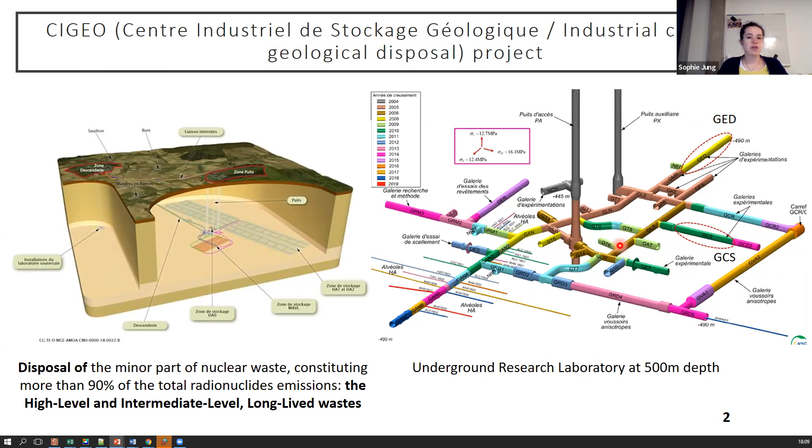During the excavation of the drifts constituting the underground laboratory, two different types of fractured zones have been observed, depending on whether the drifts were excavated in the direction of the minor principal horizontal stress or the major principal horizontal stress. For the first type of drift, the fracture zone tends to extend in the vertical direction, whereas in the second type, the fractured zone tends to develop in the horizontal direction.

For the first kind of drift, the convergences are very different: the vertical convergence is much higher than the horizontal convergence, whereas in the other type of drift, it's the horizontal convergence that is much higher than the vertical one. So it seems that the fractured zone influences, to some extent, the convergence of the drifts.

Many research teams have been working on modeling the convergence of those drifts, and their work has been published. Some of it appeared in an article by Seyedi et al. in 2017. The graph is kind of busy, but I'll try to make it clear. It shows different numerical simulations, hence the many curves.

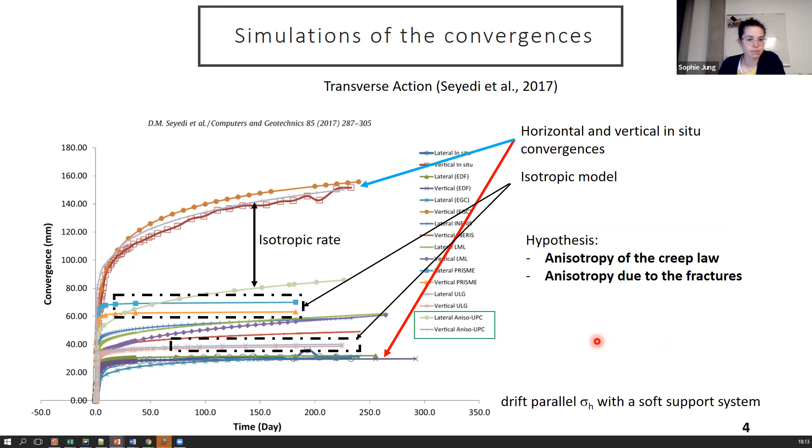So I will present you here quickly the outline of my presentation. What I'm going to present is a part of my PhD work, and I told you my two principal hypotheses.

First I will present the first numerical simulation of the convergences of GCS and GED drift with a continuous equivalent model, with numerical calibration of the parameters of anisotropy. Then we will try to link the parameter of anisotropy to the behavior of the fracture, and upgrade the numerical simulation. Finally, having linked the parameters of anisotropy to the behavior of a fracture, we will be willing to measure those parameters on a fracture.

So we also developed an experimental setup, especially designed to investigate the creep slip of a fracture.

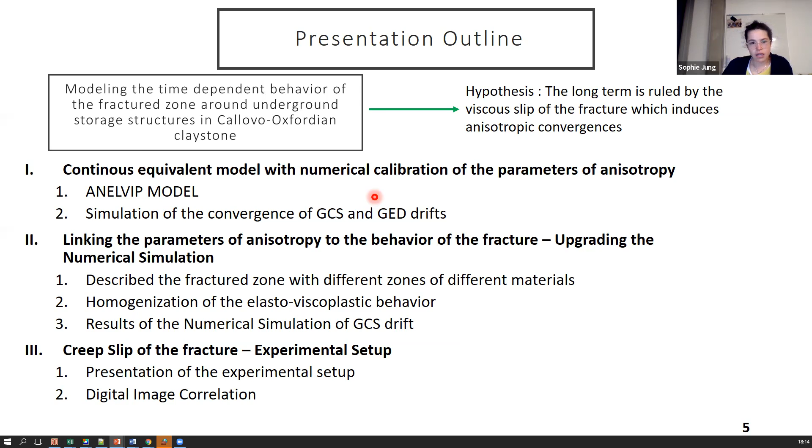First, I'm going to present the model used in the numerical simulation. It's the model ANEL-VIP, already present in the FEM code DISROC, and it's a threefold anisotropic model. The elastic, plastic, and viscous parts of the constitutive law are transverse isotropic. The plastic and viscous anisotropy are managed by anisotropic stress scaling, as introduced, but at the time only for plasticity, by Hill in 1948. The anisotropy is defined by two plastic parameters and two anisotropic creep parameters.

Basically for isotropic material, the parameters Fn and Ft are equal to 1, and the figure represented here would be a circle. Then if you change the value of Fn, you describe a change in the behavior in the direction perpendicular to the reference direction. So here you have one direction of reference, and by changing the value of Fn, you change the behavior in that direction. And so the circle becomes an ellipse, and Ft describes the behavior in shear. So the ellipse becomes a kind of star, which can be minimum or maximum at 45 degrees.

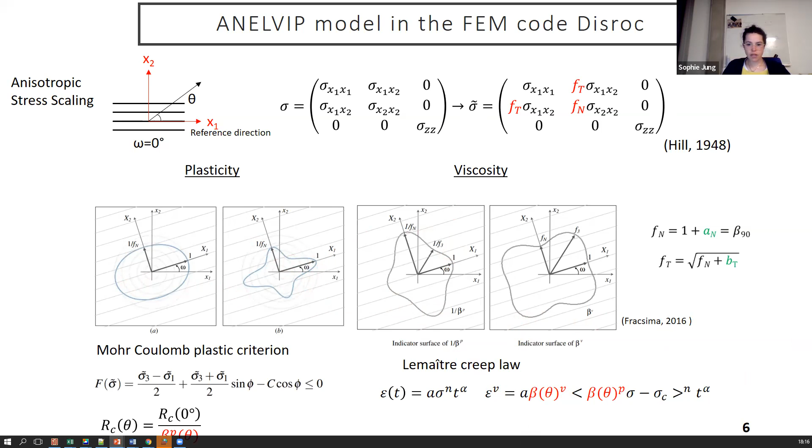In our first model, we considered one unique material for the whole medium, without making any difference between the fractured zone at the vicinity of the drifts and the sound rock. Our objective was to reproduce both measured convergence of GED and GCS drift with the same model. The elastic, plastic, and viscous law and parameters are the same for both drifts, and the anisotropy in the model is assumed to be due to the fracture.

We assume that the direction of anisotropy is the same direction as the main fracture around the drift. So basically for GCS drift, you have a vertical fracture, hence transverse isotropic orientated in the vertical direction, and the anisotropy is rotated by 90 degrees for GED drift, as the fractures are orientated more in the horizontal direction.

The parameters of the plastic and viscous anisotropy are defined by numerical calibration by comparison to the in situ observation. As you can see here, in bold, you have the result of the numerical simulation, and the other curves represent measurements of in situ vertical and horizontal convergence. There are many curves because many sections of the drifts were measured.

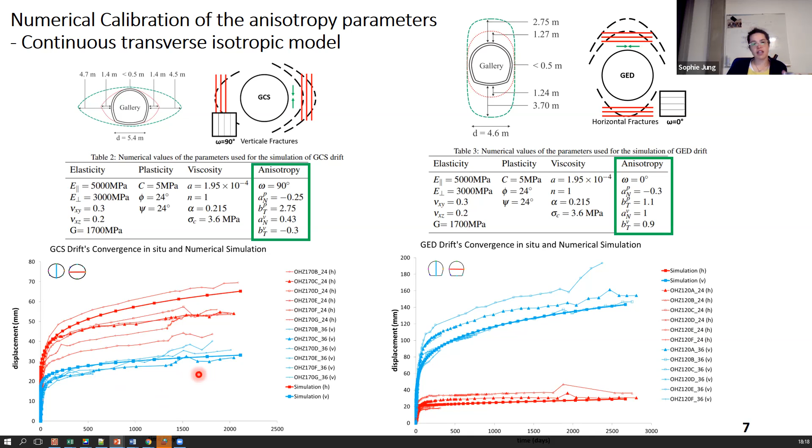So the parameters of anisotropy are different between the two drifts, as the fracture density and orientation are not the same in both fractured zones. So while the convergence are well reproduced, the parameters of anisotropy are not clearly linked to the fracture yet. At least it's not easy to understand their physical or mechanical value.

Since our idea is to consider that the observed anisotropic behavior is due to the fractures, we were wondering if we can properly link the behavior of the fractures to the parameters of anisotropy.

So now the idea is to formulate, with homogenization technique, the elastoviscoplastic behavior of one representative elementary volume constituted by isotropic sound rock crossed by equidistant parallel fracture planes, and then describe the fracture zone by such REV.

This division into different zones is done based on statistics data obtained from all the drifts excavated in the direction of the major principal horizontal stress. I will then refer to the simulation of these types of model as a simulation of GCS-type drift, so it's all the drifts which present a horizontal fracture zone.

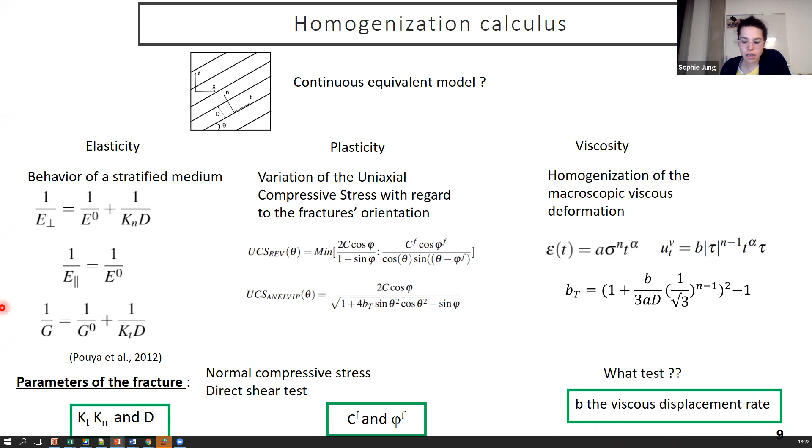Now we have, of course, validated our homogenized parameters, our anisotropic parameters. So regarding the viscous anisotropic parameters, we have compared the behavior of a heterogeneous representative elementary volume to the continuous equivalent model.

Now I'm going to present very quickly the results on GCS type drifts, the drifts which present a horizontal fractured zone. We have simulated the convergence of the drift with the FEM code DISROC with a model containing different zones of different REVs presented before. Here you have 3 zones.

I'll go quickly. You can see that we can reproduce pretty well the convergence that is measured in situ.

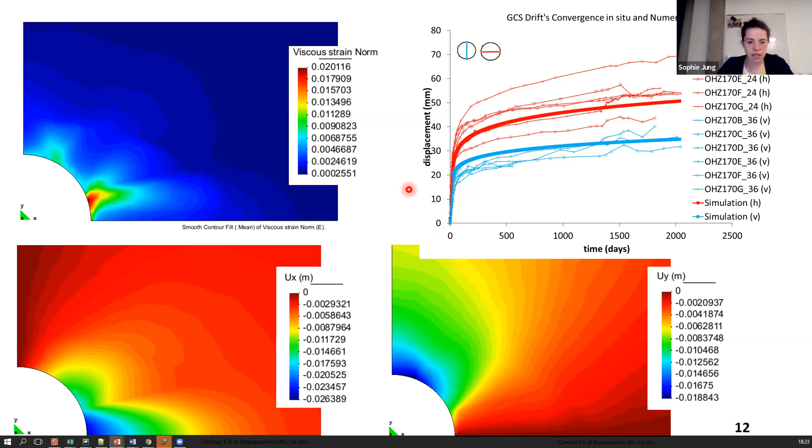Now I'm going to present the experimental setup, designed to study the creeping behavior of a fracture in the Callovo-Oxfordian claystone. The setup is designed to investigate the viscous behavior of a fracture in the COx claystone, which comes down to studying the slip of the interface between 2 blocks of rock under constant shear stress.

The blocks of COx claystone are also kept under constant normal stress. The experimental setup is composed of a cylinder controlled by a LabVIEW software that dispenses the shear force, and of an oedometric frame, which you cannot see here, but that allows applying a constant and stable in time stress normal to the fracture.

So 3 rectangular blocks are cut from a core of COx claystone. The dimensions of the blocks are set based on the diameter of the core provided by Andra. From now on, I will refer to the 3 blocks as one sample.

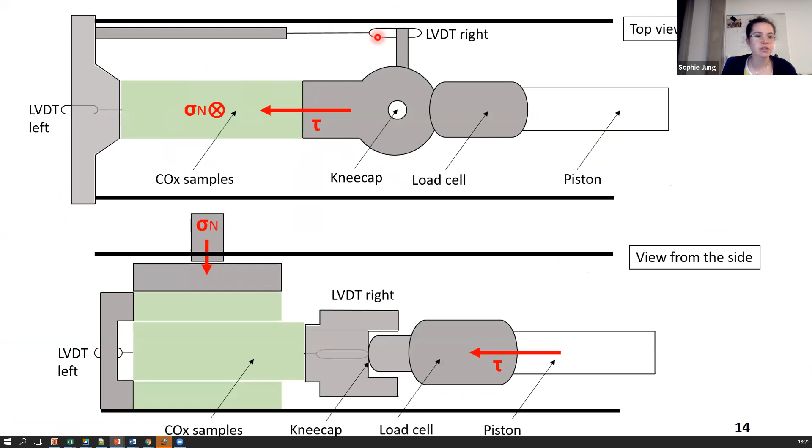2 LVDTs are placed on each side of the sheared sample. The middle one is the sheared sample, and 1 LVDT is placed — you can see it better here — to measure the movement of the piston, and another LVDT is placed behind the block to measure the average displacement of the central block. A force sensor, located here, allows the piloting of the cylinder at constant stress.

The middle block is 2 centimeters longer than the 2 other blocks, just to keep the sheared surface constant during the experiment.

Moreover, in order to use digital image correlation, the lateral faces of each of the blocks — you can see it here — are polished to bring out the microstructure of the rock and thus create a natural speckle. You can see here that the blocks are not polished, so it's quite a different aspect.

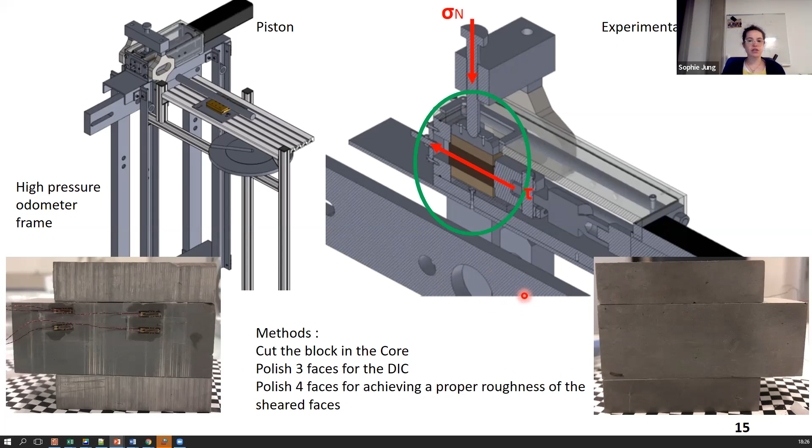Also, the 4 surfaces sheared during the experiment are polished so that the roughness of the faces is as similar as possible to the roughness of the sheared fracture present around the underground laboratory structure.

Regarding the digital image correlation, we use a monochrome camera with a 150 million pixel sensor, which is quite a lot, to acquire the images. To obtain maximum resolution of the whole sample, the camera is mounted on 2 motorized displacement stages that you can see here.

One stage is used to move in the direction parallel to the sample. We take each time 2 pictures of the sample, one of the left side and one of the right side, to increase the resolution of each picture.

The other stage is piloted to make a very precise focus, allowing the camera to move backward and forward relative to the sample. The focus is optimized by studying the variance of gray levels normalized by its mean value, and the whole focusing process is completely automatized.

Along the experiment, the automatic focus runs before each picture is taken, and a picture is taken every 10 minutes, actually every 5 minutes, because 2 pictures are being taken each time.

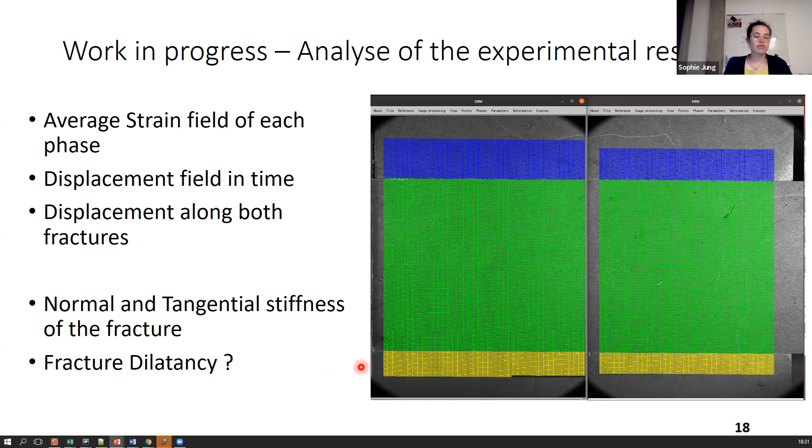So what we are looking at is the average strain field of each phase, the displacement field in time, the displacement along both fractures, and of course we are also able to measure all the parameters possible through classical tests, such as the normal and tangential stiffness of the fracture, maybe the fracture dilatancy, etc., which is also a way for us to validate the process.

To conclude, many research teams are working on the modelization of the drift of the underground research laboratory. We have chosen a new angle compared to the others by working on viscous anisotropy, assuming that this viscous anisotropy is due to the fracture.

We can say that the first model allows us to reproduce the convergence by working on the anisotropic creep behavior. So we sort of validated the fact that the anisotropy of the viscous law has a major influence on the convergence of the drift.

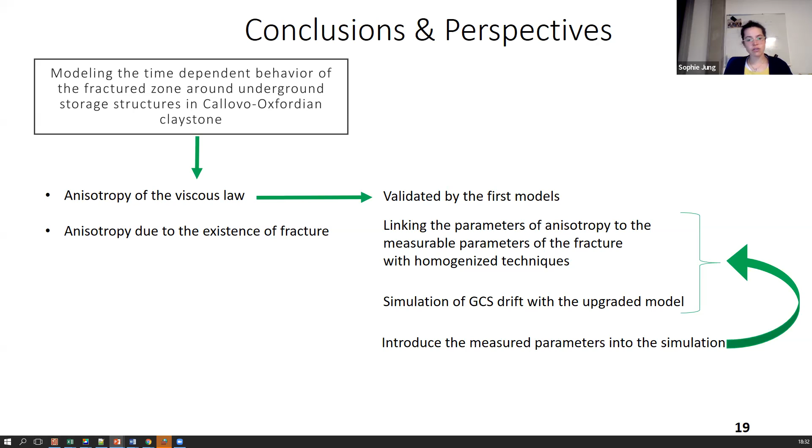Then we improve the models by explicitly linking the anisotropy parameters to the fracture parameters. Finally, the objective will be completely achieved when we can feed the numerical simulation by zone with the experimental results and our more detailed comprehension of the behavior of a single fracture.

So thank you for your attention.

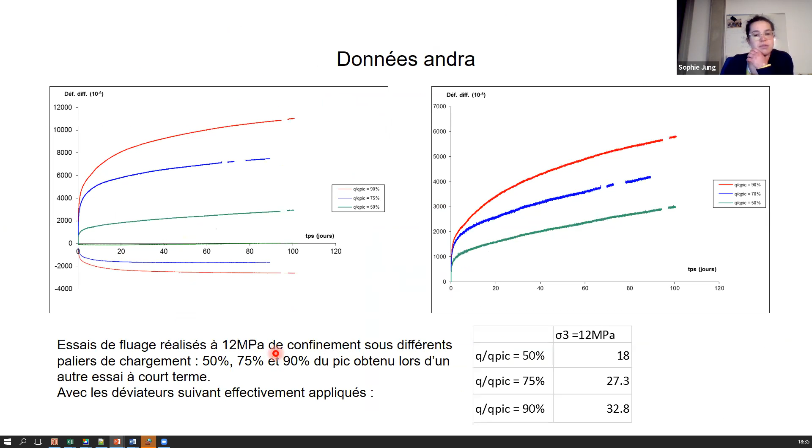Yes, this was like creep tests provided by Andra, which I used to calibrate the parameters of the law of Lemaitre creep. Okay, thank you.

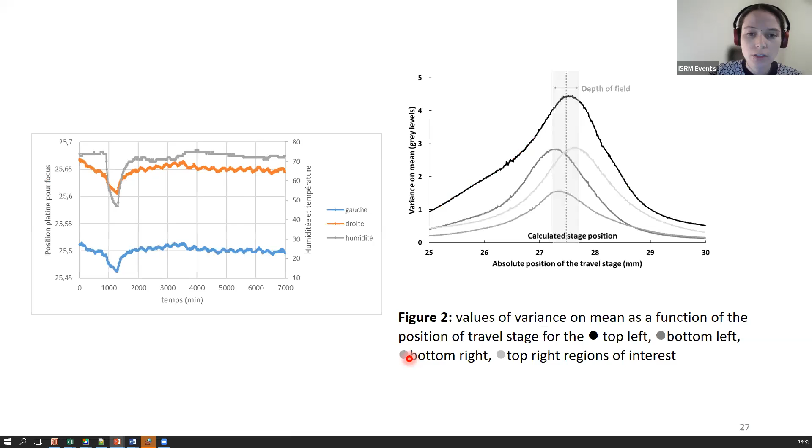We have a question in the chat. Two questions. First one, what are the in situ stress? Is the depth fixed by the GOV or by geological conditions? Thanks.

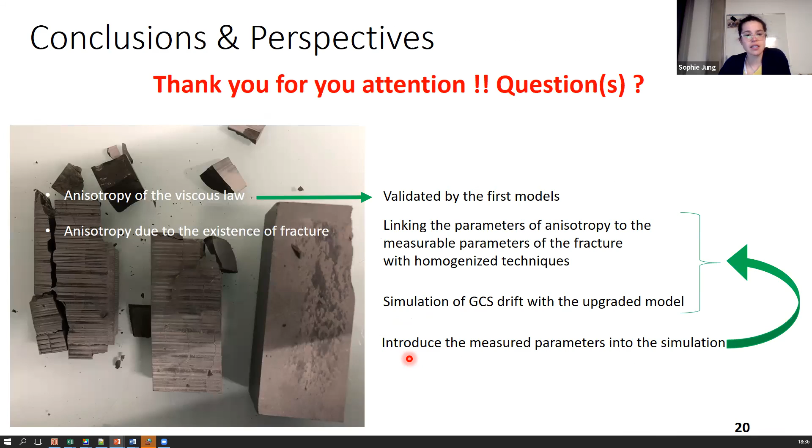So for the in situ stress, the two drifts don't have the same in situ stress. For the drift oriented along the major principal horizontal stress, the state of stress in a cross section is almost isotropic, with 12.7 MPa vertical and 12.4 MPa horizontal, and the major horizontal stress is about 16 MPa. So in the cross section of the other drift, you will have 12.7 MPa and 16 MPa in the horizontal direction. The other question was, is the depth fixed by the geological formation or by what?

Is the depth fixed by the GOV or by the geological conditions? By the GOV, meaning the government, I guess. Or no? Yes, okay, so it's the geological condition. They identified that COx was a good host rock because of many different criteria, and the COx is located at 500 meters depth.

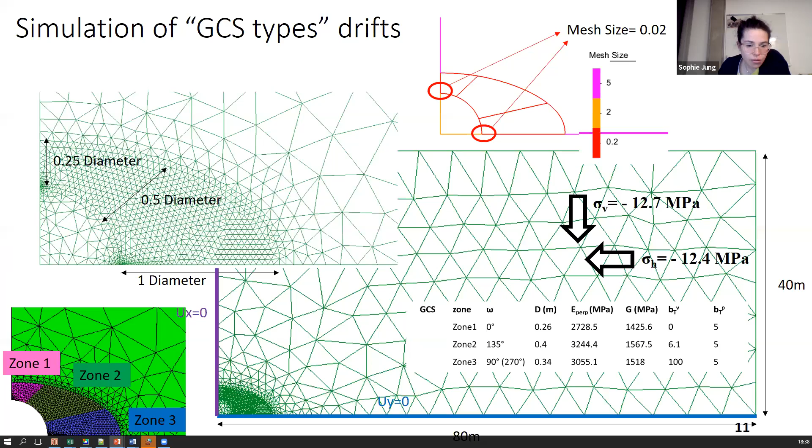Okay, reduce the effect of matrix deformation by shortening the sample - maybe, it's probably true. Well, I'm not sure, maybe it should be tested, but then you have less. I mean, we see that the behavior is heterogeneous along the fracture, and the sample is already quite short compared to the actual shear fracture present around the drift. So we have to manage the difference between the scale of the sample, the scale of the experiment, and the scale of the fracture in situ, since we are willing to study the behavior of those in situ fractures.

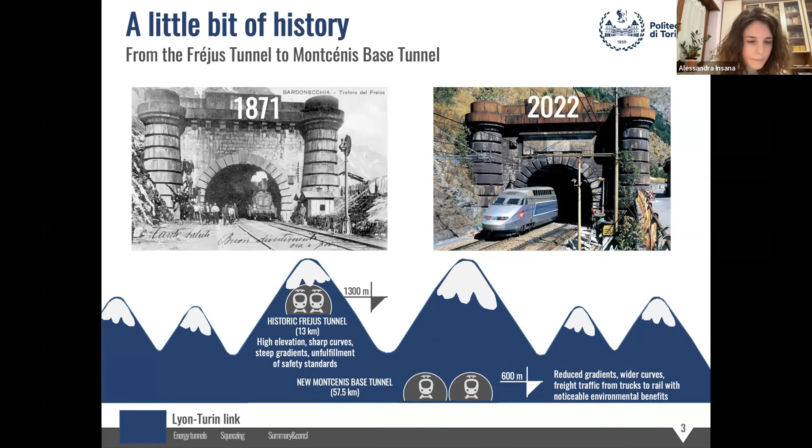especially in the framework of the TEN-T network. This is why a new tunnel is being built at a much lower altitude. You see here the altitude of the new tunnel, the Mont-Cenis tunnel, much longer, 57.5 kilometers against 13.

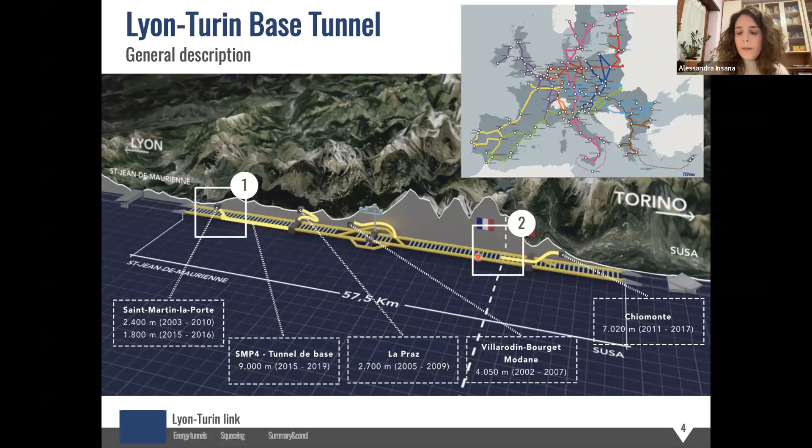So let's start with the first challenge, the time-dependent behavior. As I said, we are focusing on this area. We have 4 access adits, 3 on the French side and 1 on the Italian side. Especially in Saint-Martin-la-Porte, an access tunnel called SMP2 was built between 2003 and 2010. However, this access tunnel crossed a formation called the Carboniferous Formation Houiller, which is also the reason why the tunnel had to be reoriented. Severe squeezing was encountered, with large metric convergences, ovalization of the section, and also failure of the preliminary temporary support.

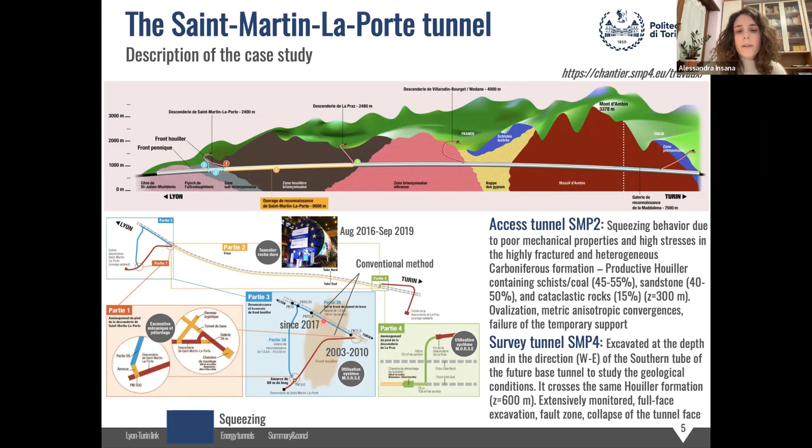Now, since 2017, another tunnel, a survey tunnel called SMP4, is being excavated, still with conventional method, along the direction of the future southern tube of the base tunnel, and it is crossing the same formation, so squeezing is expected. So how to deal with this behavior?

Of course, there are in the literature empirical and semi-empirical relationships that allow us to evaluate whether we can have squeezing or not, and also the degree of squeezing. But then we have to really quantify it. So in our laboratory, you see here some pictures: we have this special equipment called a high pressure triaxial apparatus, that allows us to perform triaxial tests at very high confining pressure, up to 64 MPa.

It is fully controlled with automatic acquisition of data and also local measurements of strains in the radial and axial direction. So you see on the right some pictures during the setup of the specimen.

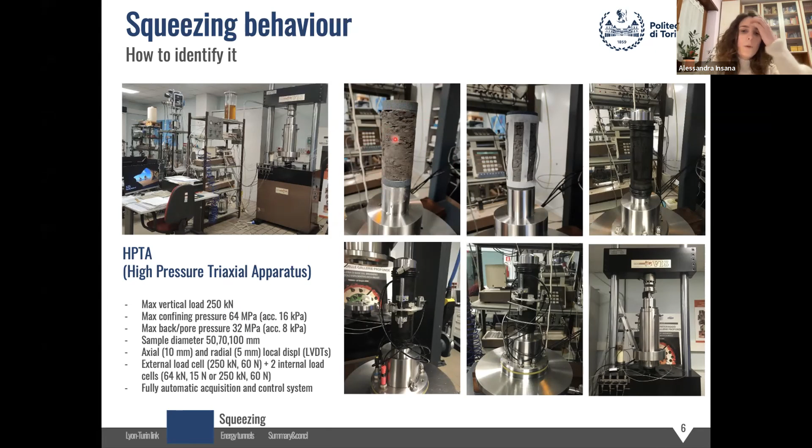This actually is a specimen of clay shales coming from central Italy. We have just concluded an experimental campaign on such material.

Here you can see some examples of creep tests, triaxial creep tests that we have performed. So the creep curve corresponding to this deviatoric stress can be seen below. And we can also appreciate the so-called apparent consolidation phenomenon, that is, after a creep phase, when we reload the sample, the stiffness of the sample is much higher, but then it goes back to the stiffness it had before the creep test.

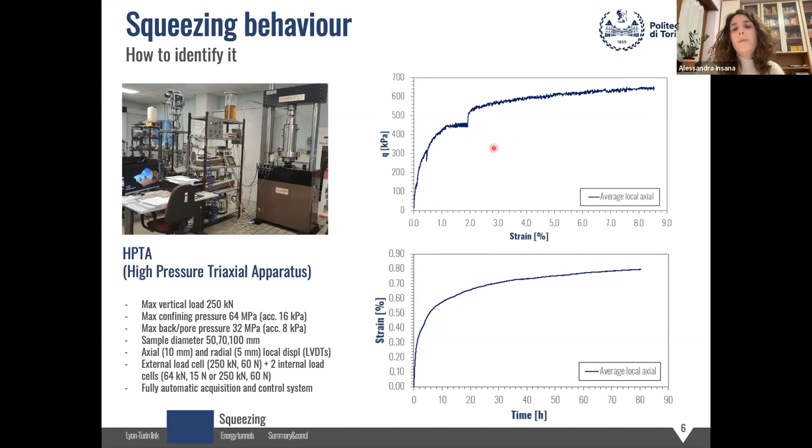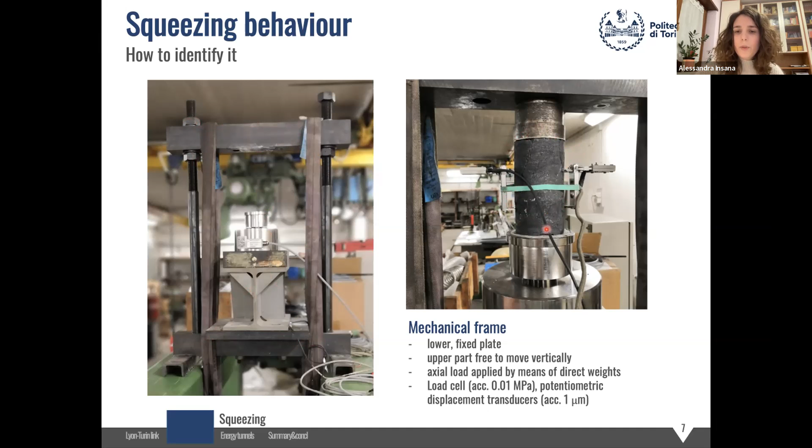Then another equipment is very simple, actually, and we used it because the other one was not available. It's a mechanical frame, so very simple. We have a lower plate that is fixed and an upper plate that can move vertically thanks to a system of direct weights. On this equipment, we performed an unconfined creep test that we'll see in a while, exactly on a sample of coal coming from SMP4 that I've described before.

So once we identify that we can have creep, then the objective is to perform numerical modeling, so to find time-dependent constitutive laws that allow us to well reproduce displacements, deformations, and stresses.

Sophie talked about a time-dependent constitutive law for fractures. Here we're seeing the SHELVIP model, which was formulated in 2009 by Debernardi. This is an elastoviscoplastic constitutive model which couples the classical theory of elastoplasticity with the overstress theory of Perzyna for elastoviscoplasticity. So the strain tensor is split into three components: elastic, plastic, and viscoplastic. While the elastic and plastic strains can be evaluated as usual in the classical theory of elastoplasticity, the viscoplastic strain is based on Perzyna's overstress theory.

That is, we have a yield surface, and the viscoplastic yield function can be both positive or negative. If it is positive, then we can have viscoplastic strains, while if it is negative, we are in the elastic field, so we won't have any viscoplastic strains. It's called overstress theory because it's a measure of the overstress, so the distance of the stress point from the yield surface. So the viscoplastic strain rate is expressed as a function of the so-called fluidity parameter, the viscous nucleus, the overstress function, and the viscoplastic potential function.

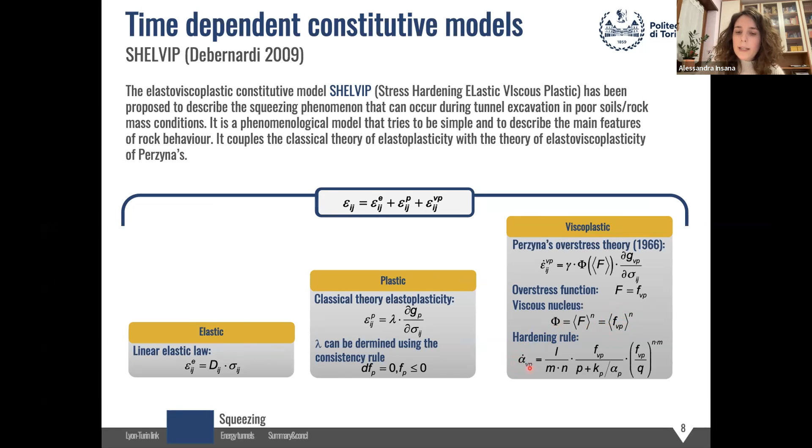So in the triaxial stress space, we have two yield surfaces: the viscoplastic one, which is based on a linear Drucker-Prager criterion, so alpha P and Kp are the intercept and the slope with the Q axis, and a plastic surface. Sorry, I inverted them - the plastic surface is the one I've just described, and the viscoplastic yield function is homothetic. So the intercept with the p-axis is exactly the same, and the slope is given by alpha VP.

So we can have three different behaviors: elastic if we are below FVP, elastic viscoplastic if we are between FP and FVP, or if we are exactly on FP, elastic viscoplastic and plastic.

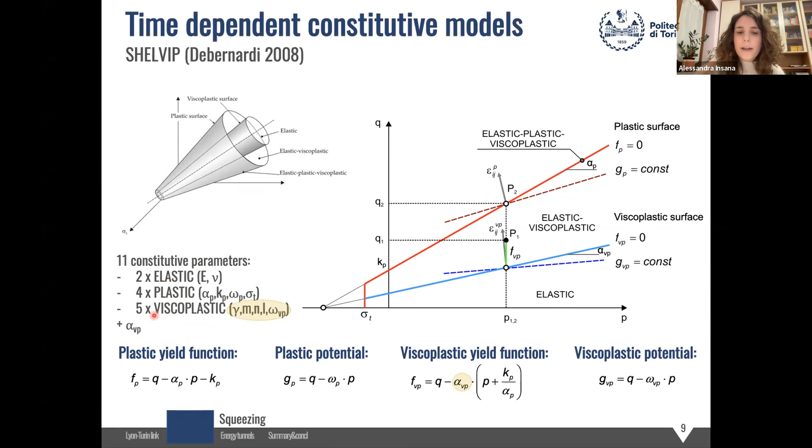So this model is constituted by 11 parameters. Two are elastic, four are plastic, and these can be evaluated according to classic laboratory tests, for example, triaxial tests, and then five viscoplastic parameters. And then we have the state parameter alpha VP that defines the slope of the viscoplastic surface, so the onset of viscoplastic strains.

Now we will focus on the viscoplastic parameters. This is important because in the calibration procedure of these parameters, it's important to know their meaning. So gamma is the fluidity parameter, and it defines the amplitude of the viscoplastic strains. M is the shape factor, and it defines the shape of the creep curves. We see here on the right that the value m equal to 1 is a kind of critical value, because if m is smaller than 1, then we can describe primary creep.

If it is bigger than 1, the limit of the axial strain for time tending to infinite tends to infinite, so we can describe also secondary creep. Another interesting thing is that in the plane axial strain rate versus time, we have a long-term asymptote whose slope is equal to the inverse of m.

Then we have n, the load factor, that defines the dependency of epsilon VP, the rate of the viscoplastic strain, from the deviatoric stresses, a time stretching factor that scales the curve with time, and viscoplastic dilatancy, which is the ratio of volumetric to deviatoric viscoplastic strains.

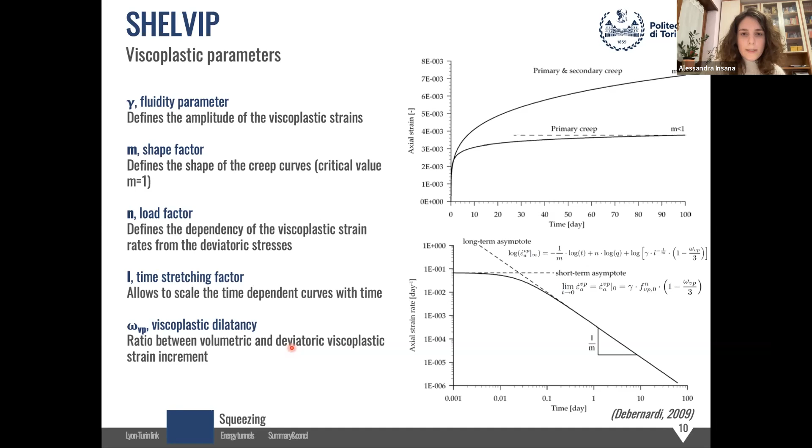So in terms of geometrical effects of these parameters, if we increase m, the slope of the curves of axial strain rate against time decreases. If we increase gamma, the curves move upwards, while if we increase L, the curves stretch towards the left.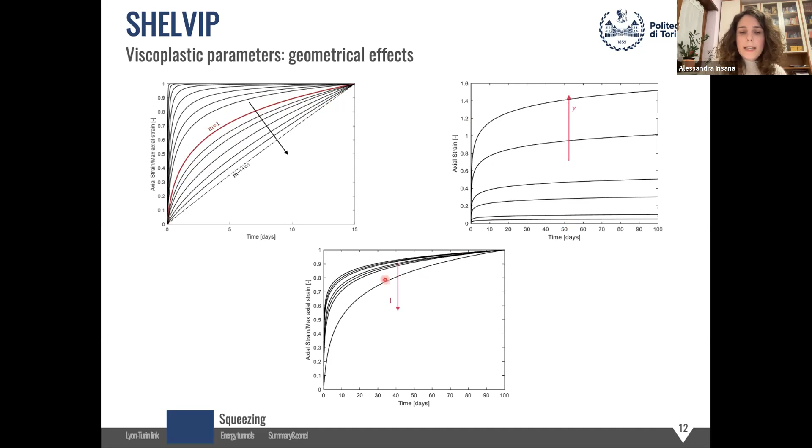So if we look not anymore at the plane of axial strain rate, but of axial strain, then the role of m is to change the shape of this curve. We've called it the shape factor. Gamma changes the amplitude of the strains, and L changes the time scale.

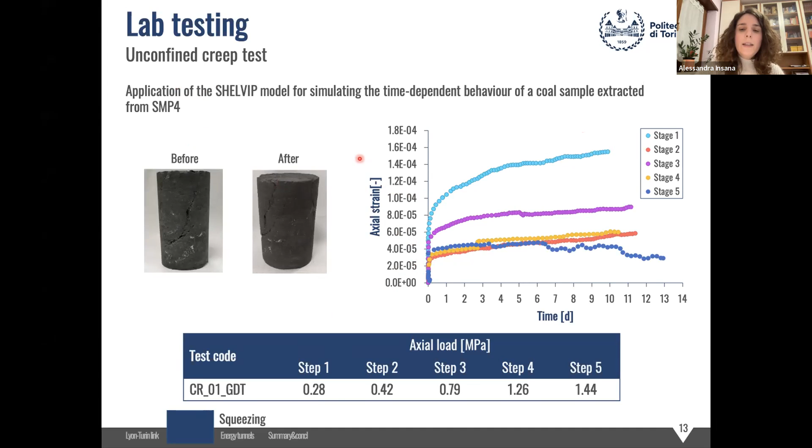You remember we talked before about mechanical laboratory testing, and for example, that mechanical frame. On that mechanical frame, we performed unconfined creep tests with 5 loading stages, and we considered the first stage to illustrate the calibration of the parameters.

To calibrate the parameters, we didn't start from nothing, but had some parameters already calibrated by Debernardi. At the beginning we considered exactly the same parameters, but we obtained the uppermost curve, this one. So we had to change slightly the parameters to better fit the result from the creep curve obtained from the laboratory test. In particular, what we changed was gamma, m, and L.

As you see, we didn't change them much. By the way, we have to remember it's not easy to say we changed a lot or a little the parameters, because some expressions are to the power of m or to the power of n. Here n was kept the same, but m changed, so a little change in m might change a lot the other two, gamma and L. However, we didn't change them much.

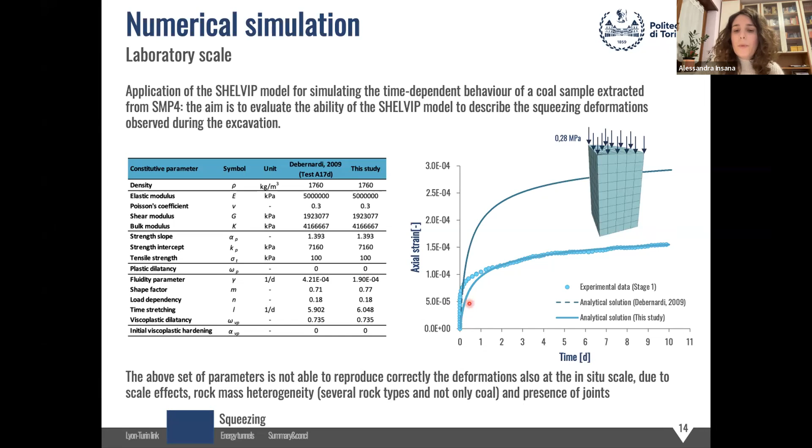But we have to say, before there was a question by Professor Aleana about scale effects. Well, here also we have scale effects, and so these parameters are not appropriate to simulate the in situ behavior. We'll see in a while what's the in situ case study we considered. This is due to heterogeneity of the rock mass, to the presence of joints, fractures, and of course to scale effects. So we moved to the in situ scale.

The case study that we considered is the one described by Yi-Chun Liu in his PhD thesis. We are focusing on changes between chainage 10,310 and 10,410 in SMP4.

So here, basically, till this point full face excavation was adopted. Then at a certain point there was a collapse of the face, and then also the steel ribs were later destroyed, due to the presence of a fault. So excavation continued with a smaller tunnel, called PS, and then enlargement of this section to the so-called RPS section.

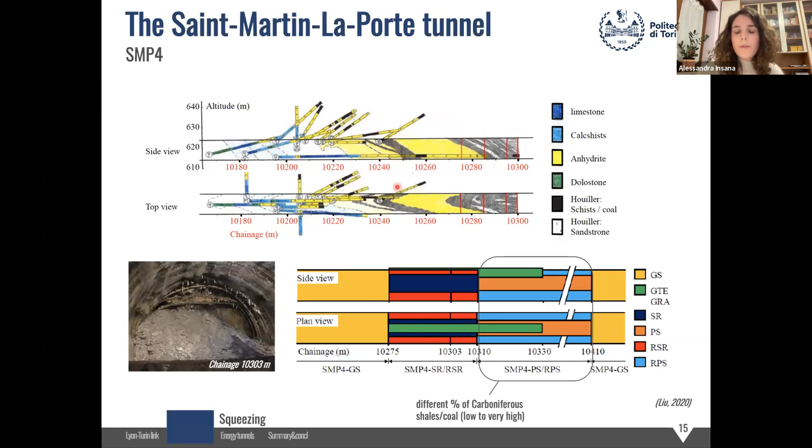So you see, well, here it reaches just 10,300, but since here we also enter the Houiller formation, so squeezing is expected.

So we performed the 3D model using FLAC 3D. I didn't say before, we implemented SHELVIP in FLAC 3D, and we validated it against the triaxial test, creep test, and relaxation test.

So we built this model, which is axisymmetric, where the in situ stress is isotropic, it's 16.2 megapascals, and we reproduced the different stages of excavation of the PS and RPS tunnels. You see below the stages.

First we have the excavation of PS, and we followed the stages followed in situ, so with a rate of 0.6 meters per day, then 12 meters behind the face, the installation of the support, made by shotcrete and by the so-called hiDCon elements, so high deformable concrete elements. And then after that, the excavation of RPS and 5 or 30 meters behind, depending on the chainage, the installation again of the same support.

So as I said, the set of parameters found at the laboratory scale was not appropriate.

We had to change some parameters. In particular, we kept N and omega VP constant, because N is related to the deviatoric stress and omega VP is the ratio of volumetric to deviatoric viscoplastic strain, so they can stay the same. But the shape factor, the time scale, and the fluidity parameter may change in situ, so we had to recalibrate them.

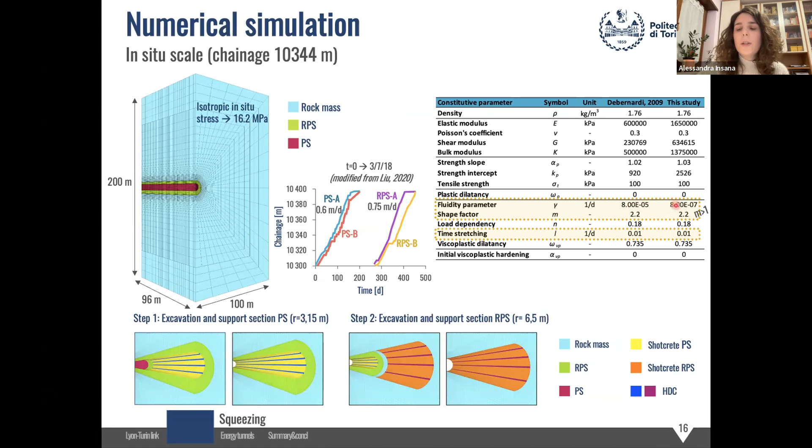In this column, we have the parameters that Debernardi also calibrated for the in situ case. For example, in his case, gamma was 8 times 10 to the power of -5, while in our case it's 10 to the power of -7, so it's smaller. This can be justified because his case study simulated SMP2, where the squeezing phenomenon reached convergences of about 2 meters, while in our case we are at about 30 centimeters, so it's reasonable that this parameter is lower.

I have to say this is still an ongoing work. We haven't found the perfect set of parameters that perfectly matches the behavior in situ.

Now I'll show you some screenshots taken when the face is exactly in the middle of our model. We are focusing attention on chainage 10,344, then when we complete the excavation and support of the PS tunnel, then when the face reaches the same chainage for the RPS, and then when the excavation is completed here.

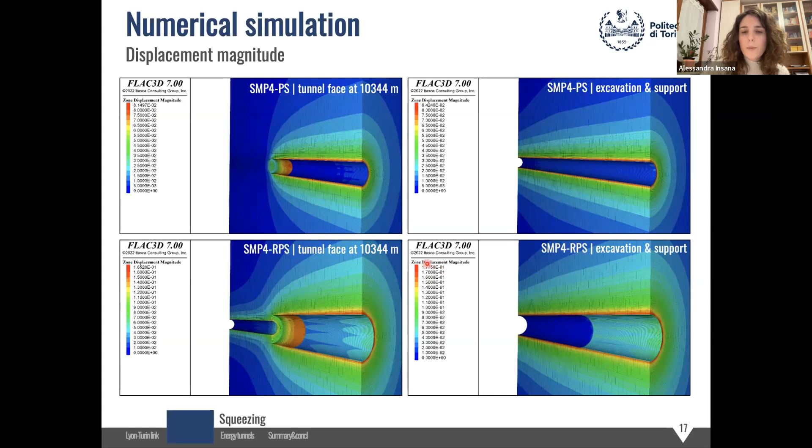We see that the maximum displacement obtained is about 17, 18 centimeters. These sections are extensively monitored, so we have the convergence data.

So we see here the results of the monitoring, the convergences in the direction highlighted here in the picture. With the parameters that we have shown, the continuous curves are the ones obtained, so we are still underestimating a bit the convergences.

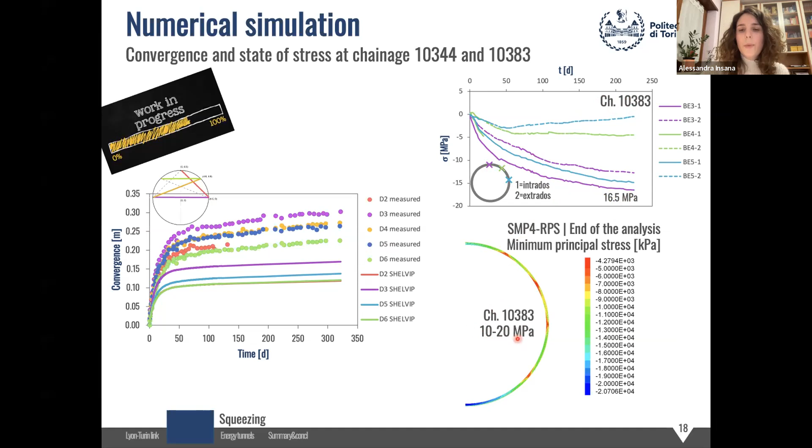Still, from the stress point of view, here on top you see a picture of the stresses at these points measured in the shotcrete. They reach up to 16.5 megapascal - we are in another chainage actually - and in the model we are between 10 and 20 megapascal. So from the stress point of view it works a bit better, but it's still ongoing work.

So this was the first part. Then for the second part, we focused on energy tunnels.

So we said, why don't we exploit this geothermal potential to extract thermal energy? We focused the study on an area with a length of 10 kilometers. We considered an average temperature in this area, which is also the area with the highest temperature, equal to 42 degrees. The idea is to thermally activate the lining by using a net of pipes with a twofold aim.

The first aim is to cool the tunnel, because the request is to have a temperature lower than 32 degrees. On the other side, we could also profit from this extracted energy to fulfill energy needs in the area.

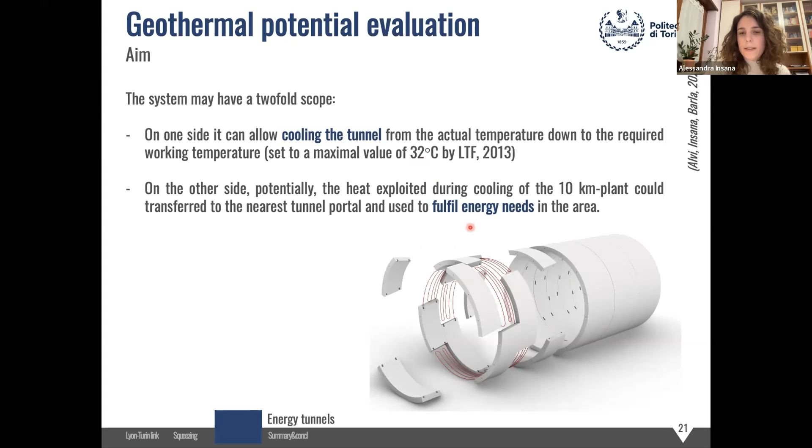So to evaluate the geothermal potential, we built a 3D numerical model coupled both thermal and hydraulic. If we zoom on the tunnel, we simulated it with its dimensions, a diameter of 8.4 meters, and we also simulated the air explicitly with a finite element mesh, because we want to see the interaction between this technology and how the temperature changes inside the tunnel.

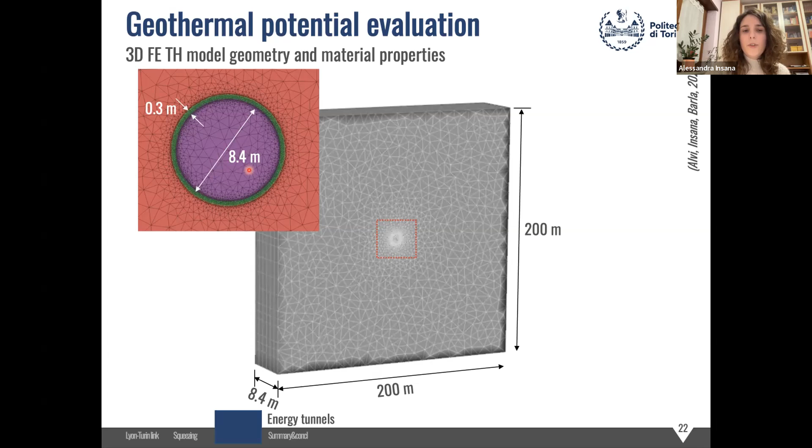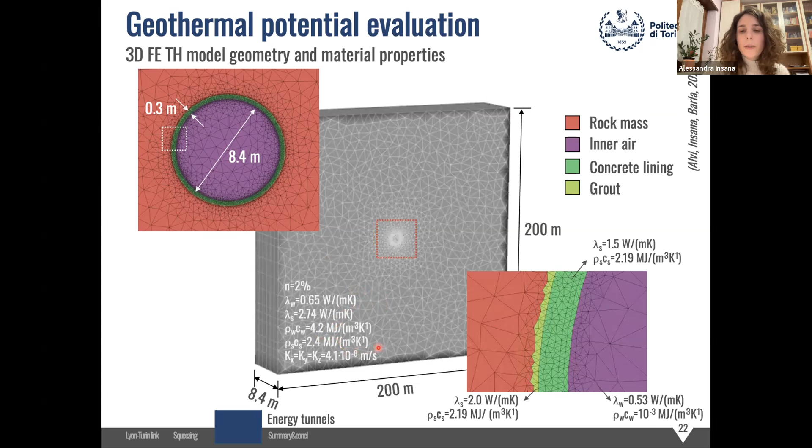We defined the material properties, both thermal and hydraulic, in terms of thermal conductivity of the solid and fluid phase, the volumetric heat capacity, and hydraulic conductivity of the rock mass and of all the different materials. The boundary conditions, in terms of temperature, are equal to 42 degrees. We don't have a groundwater flow, but we have fractures that are saturated, so we impose a constant hydraulic head of 1,000 meters.

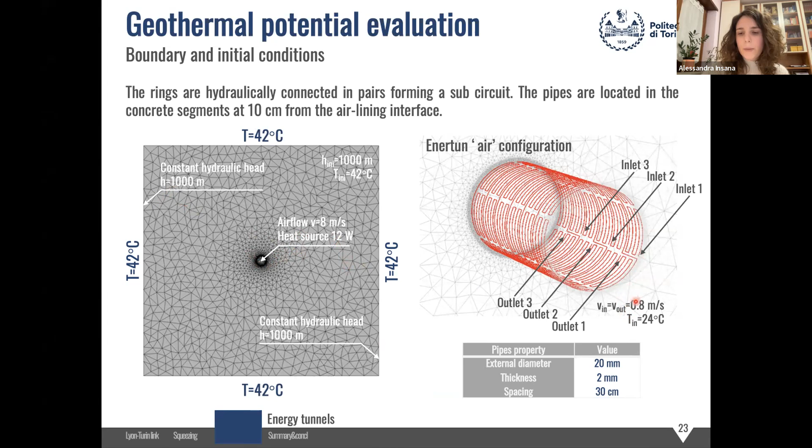To take into account the movement of the trains inside the tunnel, we considered an airflow of 8 meters per second and a heat source of 12 watts. The velocity imposed at the inlet and outlet of the pipes is 0.8 meters per second, and the inlet temperature is set to 24 degrees.

So what can we see from the results in the long term? Here we have the specific thermal power per meter over time, for 10 years of numerical simulation. We considered 4 different operating modes: a continuous operating mode, a cyclic mode where the 3 summer months were excluded, or 5 in the third case, and a monthly activation.

We see that the thermal power we can exploit ranges between 1.8 and 2.6 megawatts. In terms of temperature, depending on the operation mode, the lowest value is for the continuous one. In terms of the temperature of the air inside the tunnel, measured at this point, we see different behaviors.

With the monthly mode, after 2.5 years we are able to keep the temperature below the threshold. With the continuous one, we reach this aim immediately, while with the other modes, in one case we reach it exactly at the end of the 10th year, while with the green curve we still haven't reached 32 degrees.

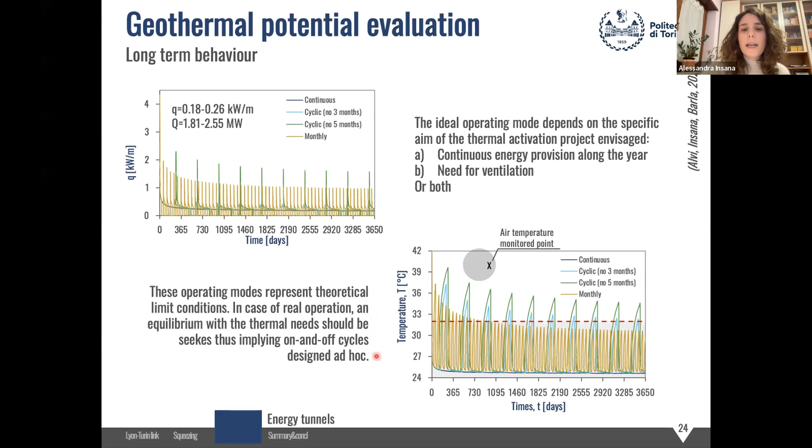So these were 4 theoretical scenarios, but the ideal operating mode depends on the aim. If we want to provide continuous thermal energy, we have to opt for the continuous mode, but if we want to ventilate the tunnel, then we could opt for the monthly activation. It basically depends on the aim, and in any case, the use of the thermal energy lining has to be tuned to it, with on and off cycles designed ad hoc.

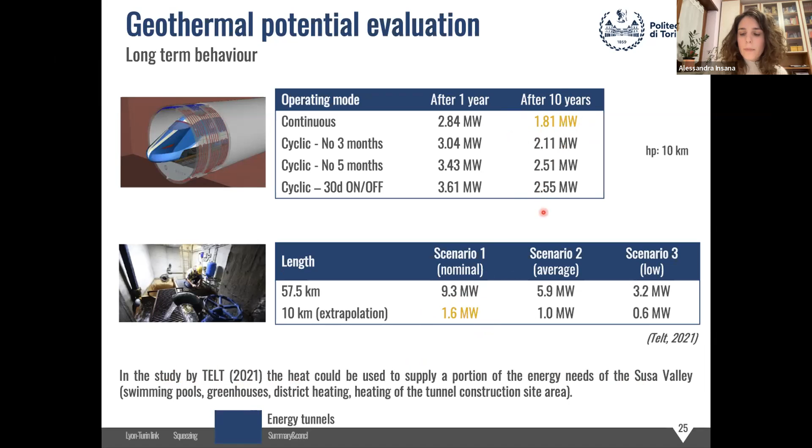Here we see the results of our study at the top, and the results from a study by TELT in 2021, where they evaluated the thermal power obtained by using thermally the water drained during excavation and bringing it to the portal, to supply energy to the Susa Valley on the Italian side, for swimming pools, greenhouses, and district heating. The results we obtained, even in the worst case, are very similar in order of magnitude to theirs, and in some cases more favorable. So it's a viable and interesting alternative.

To conclude, when using time-dependent constitutive models, the calibration of constitutive parameters is not an easy task and is quite time-consuming. We have seen that this has to be done both at the laboratory scale and, most often, also at the in-situ scale. For the future, an idea could be to try to relate these constitutive parameters to the proportion of coal or carboniferous shales, so that we could enhance the predictive capability of the constitutive model.

About the second topic, we have seen that energy linings can be an interesting alternative, even because we have advantages, for example, in terms of ventilation of the tunnel. So that's all.